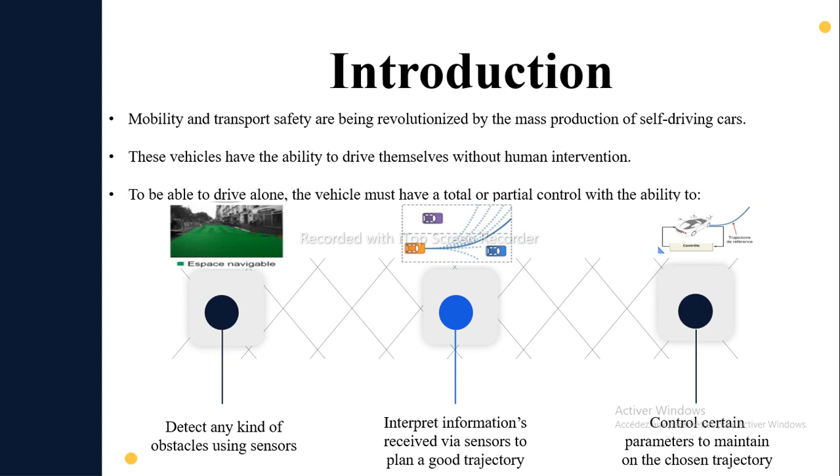Several techniques and algorithms are used for the control and the command, of which the lateral control is the subject of our study in this paper. We use the dynamic bicycle model of the autonomous vehicle as shown in figure 1 to illustrate the lateral behavior of our studied system. It is defined as follows by these two dynamic equations.

We can have the state representation of this system: x1 equal x1, the derivative of x1 equal x2, the derivative of x2 equal f1(x, t) plus function g1 times the control law. The derivative of x3 equal x4, and the derivative of x4 equal function f2 plus function g2 times the control law.

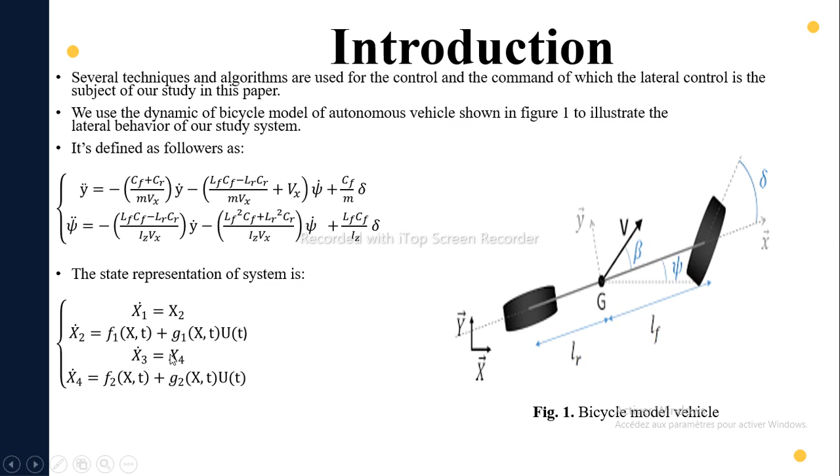This figure represents the bicycle model vehicle, where x1 represents the lateral displacement, x2 is the lateral speed, x3 represents the yaw angle, and x4 represents the angular speed.

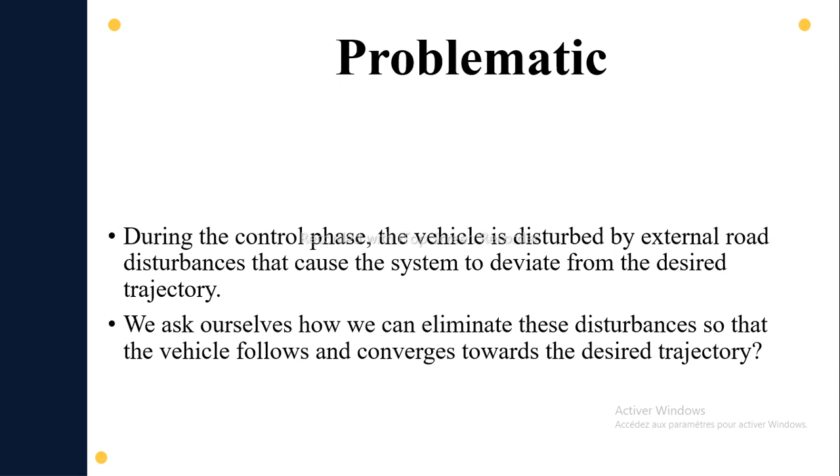Problematic. During the control phase, the vehicle is disturbed by external road disturbances that cause the system to deviate from the desired trajectory. We ask ourselves how we can eliminate this disturbance so that the vehicle follows and converges toward the desired trajectory. As proposed solutions to solve the problems raised, we proposed to use the sliding mode control, precisely a new adaptive second order non-singular terminal sliding mode control combined with the TS, Takagi-Sugeno, fuzzy logic technique.

We describe the algorithm as follows. We defined first the sliding surface. Here's the formula of the sliding surface. Secondly, we define the tracking error defined as e_v. e_v is the lateral displacement minus the desired trajectory.

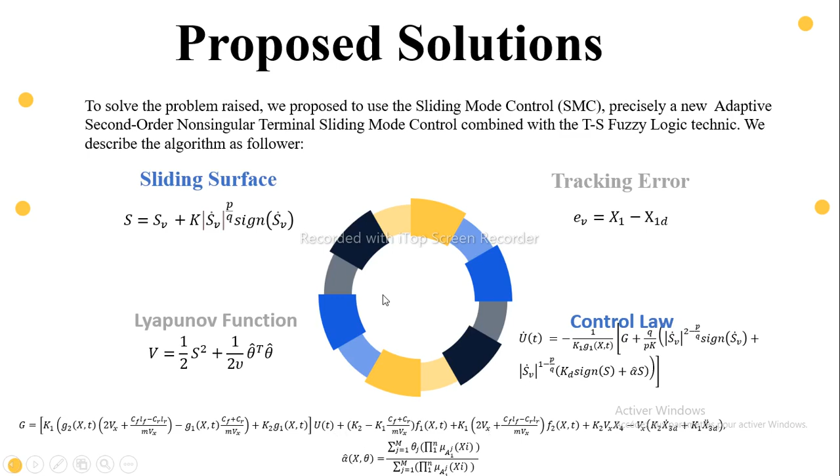Thirdly, we define the Lyapunov function to guarantee the stability of the system, defined by this formula. And last, we define the control law defined by this formula, where G is a function and alpha is the control gain determined by using the fuzzy logic technique.

Simulation results. We get the following results after simulations. Figure 2 represents the vehicle trajectory with adaptive second order terminal sliding lateral control and fuzzy logic. Figure 3 represents the tracking error. From figure 2, we can observe that the trajectory of the vehicle for the adaptive second order terminal sliding mode control fuzzy logic is driving towards the reference more quickly and precisely. The two trajectories are almost similar with an error that tends to 0. This is confirmed by figure 3, which shows the error between the output and the desired output.

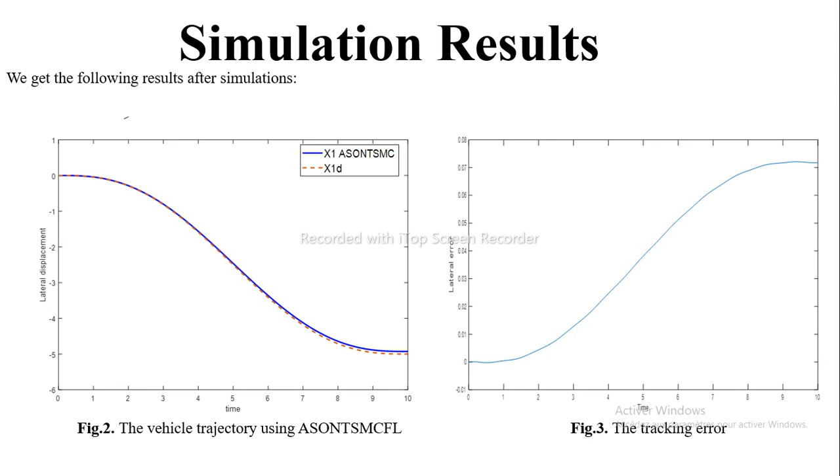Figure 4 represents the control laws generated, and figure 5 represents the behavior of alpha determined by using the fuzzy logic technique. Figure 4 and figure 5 prove the efficiency and the robustness of the algorithm developed for the control of our system. Figure 5 shows the behavior of a certain unknown positive constant alpha and its approximation obtained with the fuzzy logic algorithm, and we can see that the approximate alpha tends to alpha.

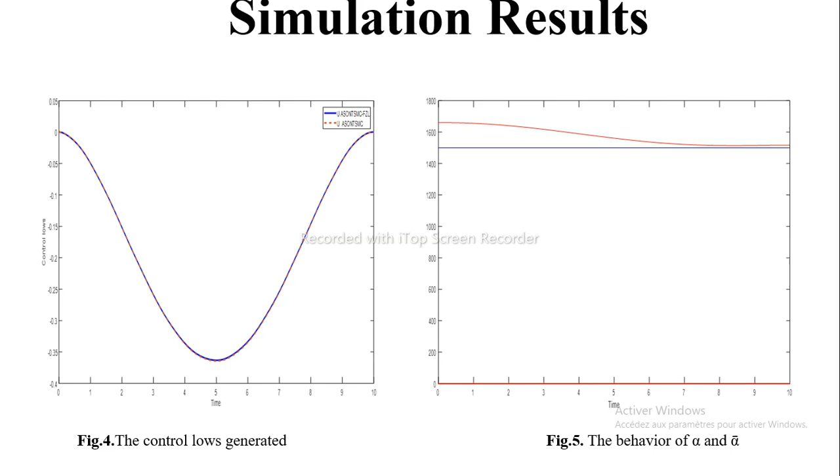Figure 4 shows the control laws obtained by using the adaptive second order terminal sliding control and adaptive second order terminal sliding control using the fuzzy logic technique, and we notice that they are merged, which proves the efficiency of the approach.

Conclusion and perspective. For this work, we combined the TS fuzzy logic algorithm with the adaptive second order terminal sliding mode control for controlling an autonomous vehicle bicycle model and to estimate a control gain. Results obtained have demonstrated the effectiveness of our proposed algorithm for the trajectory tracking, but also the control law.

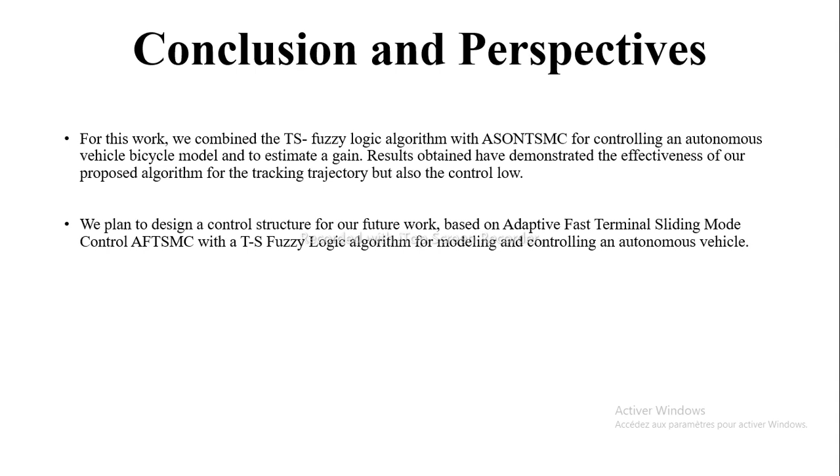For the perspective, we plan to design a control structure for our future work based on adaptive fast terminal sliding mode control with a TS fuzzy logic algorithm for modeling and controlling an autonomous vehicle. And thank you for your attention.